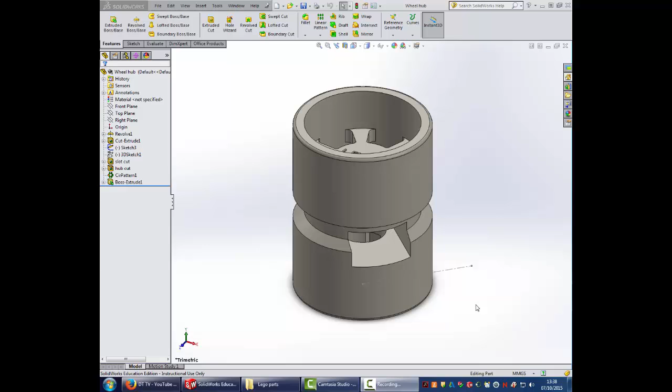Today we are looking at doing the hub for the wheel that we're going to make from Lego. The first parts are to draw this.

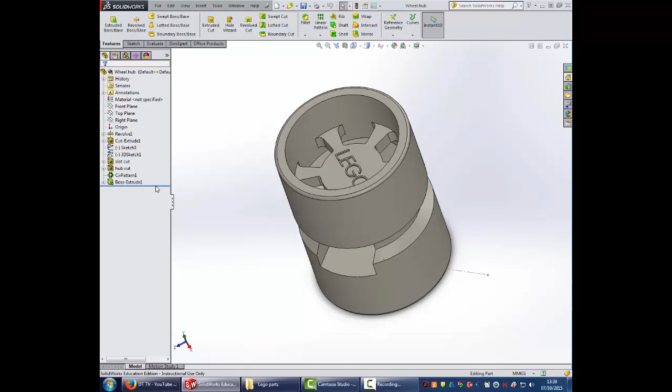Understanding it, we've already looked at the previous video, or you should have, and that shows you this comes from a revolve. In essence, what we need to start doing is drawing the basic shape. I am going to remove a lot of the detail. I'm also going to delete this revolve and say yes. The sketch you need to draw effectively sits in this area here, because what we do is use this to make the shape.

Now all the dimensions will be on the technical drawing that's going to follow this, and in essence what we do is draw this shape, making sure we've got all the right sizes. You'll notice there's a number of centre lines, and it's down to you to recognise where to put them. There are aspects where if we've got a centre line, it's probably going to be symmetrical around edges. The other thing to remember is that as you draw this, centre lines will not affect the island that you're drawing. However, if you leave them as solid lines, or solid lines floating around or on top of each other, that will have an effect and will stop SolidWorks from propagating your shape.

We're going to use a revolve, so click on the revolve tool. What it asks us to do is pick our sketch that we want to revolve, and I'm going to choose that one. So we go from being grey when it's inactive to being blue when it is active. It's asking me for my axis of revolution. Click on there, pick the centre line, and then as you can see, that gives us our 3D shape.

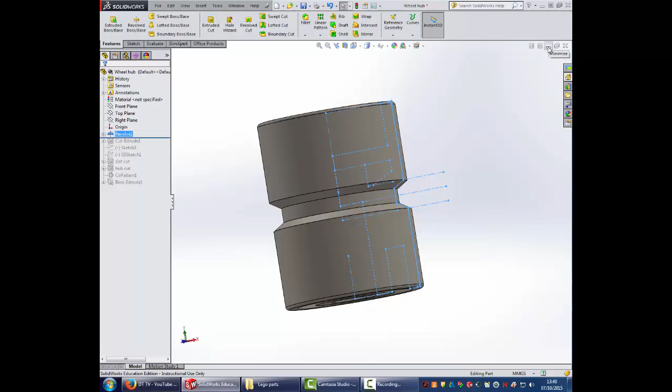With that in mind, we're now going to move forwards and have a look at the technical drawing.

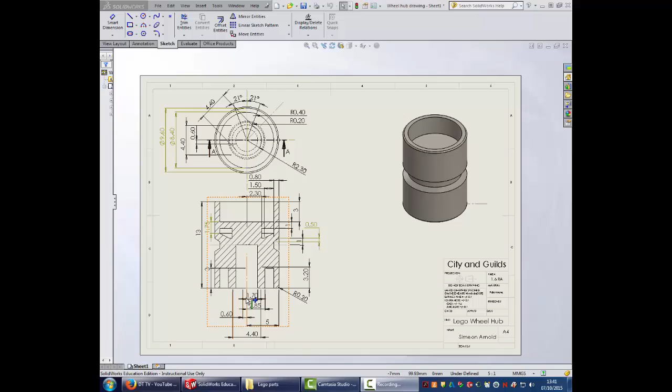So as you can see here, this is our technical drawing. Now it's got all the measurements on it that you require to work out the component elements and aspects. When you look at it, there are some dimensions that are obviously core important. We've got all the distances, so we've got leader lines that point at the lines above them. We've got the centre line here, so everything is measured from that centre line, so the arrow here points at the centre line, so the line, if I zoom in on it, you can see is 1.7 between the arrowhead there, which leads to this line, and the centre there.

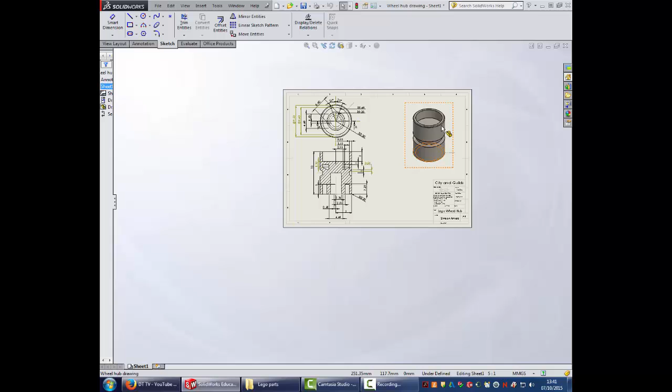Now remember, you're only drawing half the shape, so you're going to draw this half, or the other, depends on you, but it's only one half, because then we use the revolve tool to change it into our rounded shape. At this stage of the video, you should pause and use the dimensions here to create your shape.

Now importantly, whilst you're creating this shape here, there are dimensions in this view which are giving you more details. So for instance, you can see it's talking about the diameters of the circles here. If you can't find your measurement in this section, then refer to the one above. There are some dimensions in this view, such as the degrees of various component parts, which are not yet important to us. So focus on this shape, draw the half shape, and then restart the video once you've finished that.

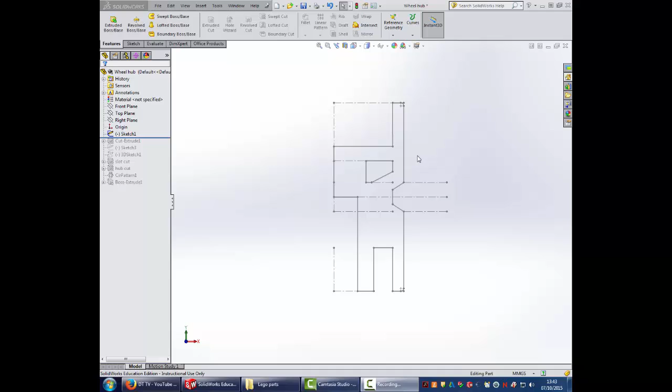Okay, so that's obviously taken you a little while to get to this stage. You're likely to have measurements and various other bits and bobs on the screen, which I've removed for clarity, but don't panic about that. You're now going to come into the 3D tools.

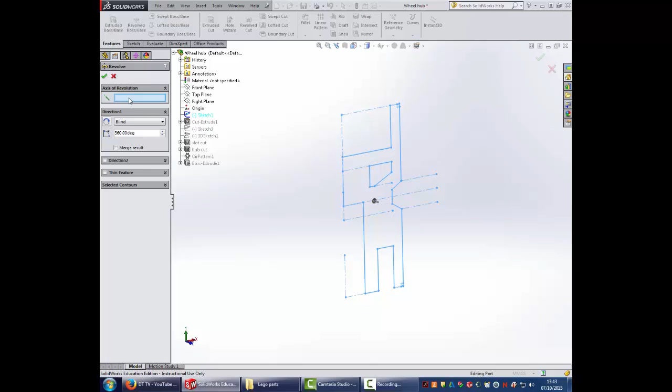You're going to use the revolve tool. You may not get this asking you to pick your particular frame, because you've already got it selected, so if it's dark blue or black, it's already there. So I've made mine so that it's come active again. In here, I've chosen the revolve tool. The axis is the centre one. Make sure you pick the right one, because if you pick the wrong one, you'll end up with an entirely different shape. So pick the central axis and then green tick it.

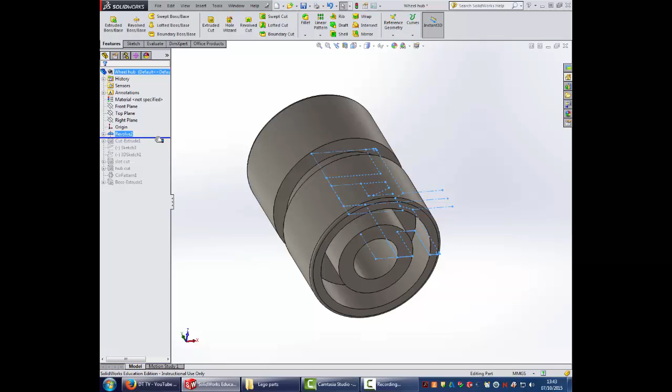Okay, so at this stage, what we've got now is the basic shape, and we need to start considering how we're going to chop the cross section into the bottom. The cross section is going to look like that in the bottom. So at this stage, we now need to work out how big and how to draw that. So we will now focus on that particular section.

So we're going to return to the technical drawing. I'm going to zoom in on this particular aspect. You'll notice the cutaway sections are represented by hidden detail, because we're looking down on the top of the view at the moment. We know they're in the bottom, so make sure when you do it, you're cutting into the bottom edge rather than the top edge. And from here, we can then work out how to do it again.

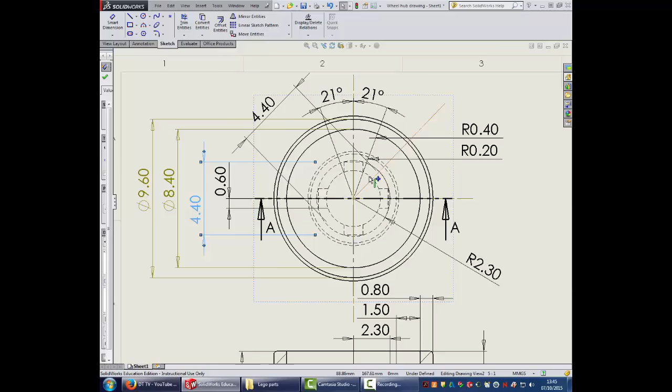There's 4 of them. There's a centre line coming across here, and there's also a centre line across here, so they are symmetrical. You'll also notice that the outside dimension with the 4.4, all the corners of each point meets within this inner circle, and each of the pieces is 0.6 either side of the centre line. Where it meets, it's then got a flat edge.

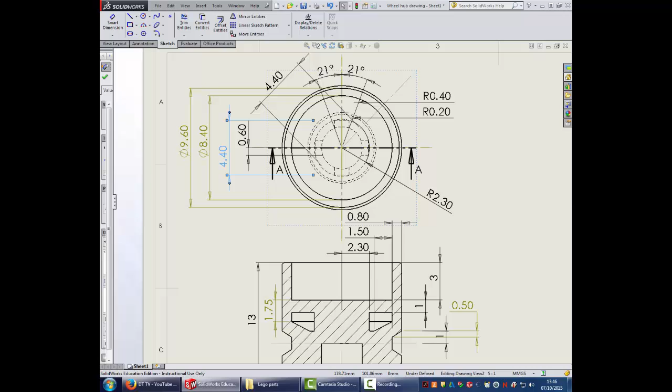So you should now draw that particular part of the drawing and then use the extrude cut tool to cut that into the product. When doing so, you will notice that you need to cut to 3 depth. So I'll leave you with that. If you pause the video and then put those aspects in, then return to the video when you've done it.

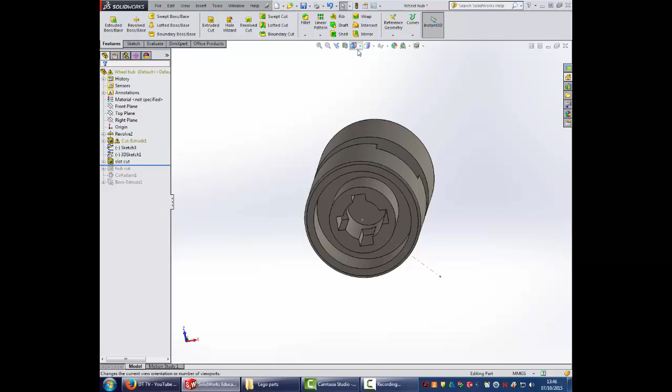On the next section now, we're looking at cutting the slot that cuts through the middle of here. Something you'll notice is that the slot itself is cut at 45 degrees to the rest of the components you've just done. So for instance, when we look at the bottom view, if I now show you the cut by going to hidden detail, you'll notice that the cut is at 45 degrees across.

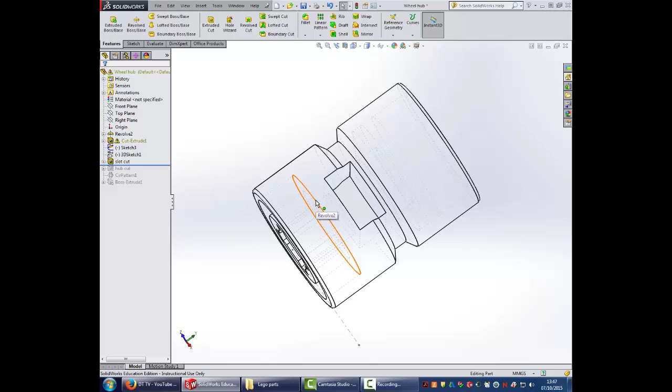Now one of the problems we have here is the fact that the circular hub is circular. That means we don't have any straight lines or straight edges pointing in the right direction to allow us to cut this particular section from the body. That means we need to create a new plane, so I'm going to show you how to do that now.

Using the sketch tools, we start here. We're going to sketch on a flat face that we know is perpendicular, 90 degrees to the view we want, and I'm going to go normal to that. At that stage, I can create my face in the middle or at some other level here, but it's easiest to do it from the middle.

So I'm going to draw a centre line, from the middle point, and make sure that it drops into being 45 degrees, 135 degrees. It depends on which way you want to do it, so have a look at the model. Because it's symmetrical, you don't have any major issues there. So 45 degrees. The important aspect here is where this point is.

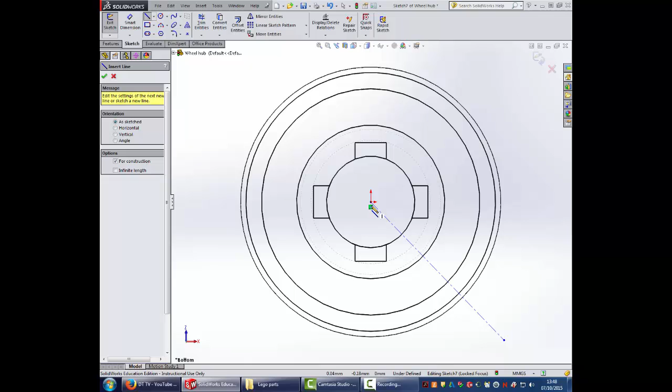I can use the end points of either here or here to create my plane, and I want one that cuts straight through the middle of my model at 45 degrees. So we'll now do that. Green tick that. I'm now going to exit out of that sketch.

Okay, from here I can then create my new plane. So what I'm going to do is use the new plane tool, the one up here. I'm going to choose the point of my line, and I'm going to choose the line itself. Now you'll notice that when I do this, a very large yellow plane comes up.

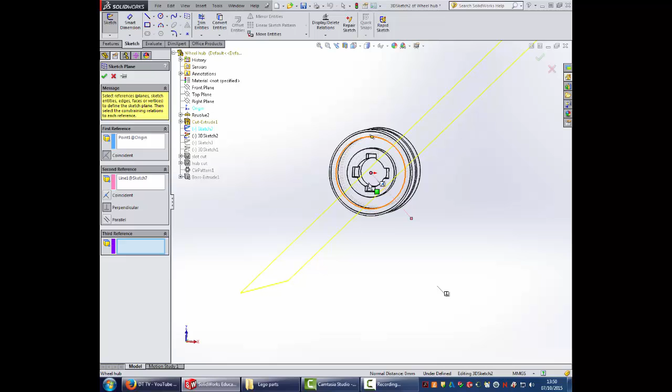Sometimes they're at a slightly wonky angle to everything, that's not a major concern. If I want the plane to cut across it this way, that's absolutely fine, I could sketch on it. Equally, I could use the perpendicular tool, because I've chosen the end point. That puts it at 45 degrees the other way.

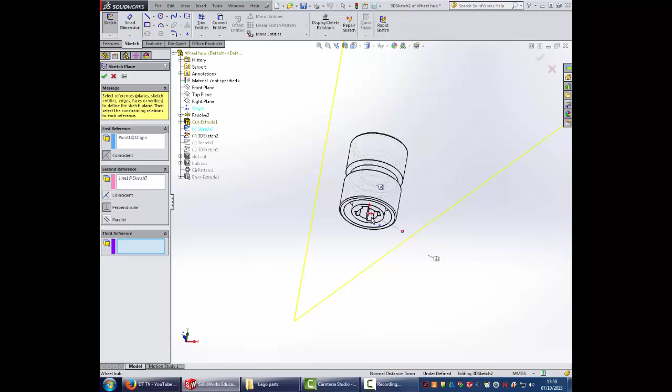As we discussed, this is a symmetrical shape, so at this stage there are no concerns in terms of which way it is, but it's a good way of making sure you can then change it. Equally, I could have chosen parallel to the line, that gives me more options. So when creating planes, you can play with how they sit in reference, but they're always at 90 degrees to the end of your line, the direction the line was drawn in. I'm going to green tick that.

Now this produces a small problem. First and foremost, the plane we're drawing on is huge, so it's quite difficult to manage sometimes, so dragging it down in size is quite useful. The second problem is that we've got a 3D sketch. 3D sketches are very complicated and tricky in terms of what they are. A normal sketch icon looks like this, and the 3D sketch looks like this. The issue is that 3D sketching involves drawing in a number of planes and understanding a far more technical way of creating your shapes.

It can be very useful, but unfortunately it's something that we don't use due to the levels of complexity, and also the fact that we can normally work our way around it without doing it.

At this stage, I've got my 3D sketch here. I do not want to draw in this as part of this 3D sketch, so I'm going to exit out the sketch. If you press the red one, it will delete the whole plane and everything else. We don't want to do that.

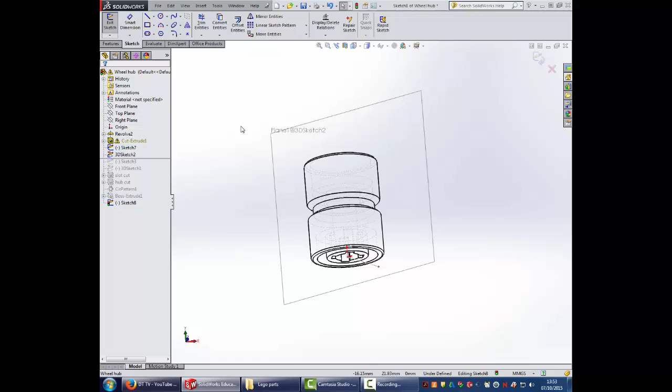We just want to exit out the sketch, so put that closed. Now what I can do is click sketch, and then choose a new plane. You'll notice a new sketch has popped up, and we're no longer using the 3D sketch. That allows us to sketch freely and create the shapes that we need.

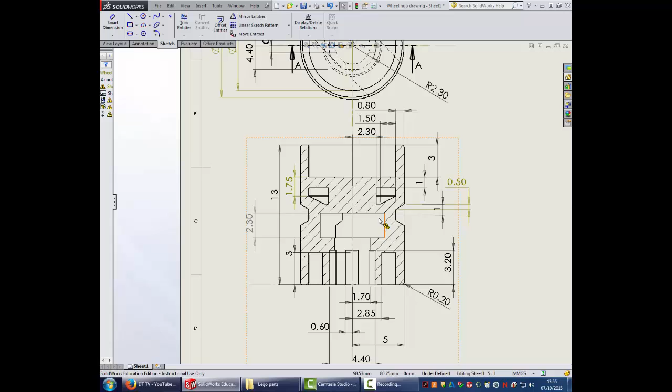Here we are looking now back at the technical drawing with the new slots cut in it. You can see that it's 4.4 wide, represented by the dotted lines, or hidden detail, that is popped in here. Equally, looking down in the bottom view, the slot is represented here, and it's 2.3 wide. I'll minimise this and go back to our design.

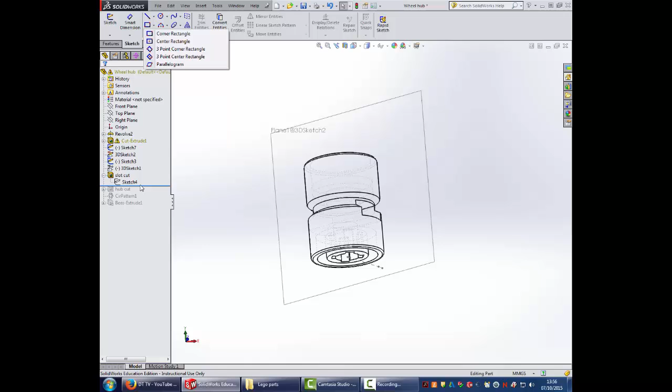If we look at this, we have the square tool, and the easiest option here is to use the center rectangle and then dimension it. You can use the middle as your point, drag your shape out, add in the correct dimensions, and then do an extrude cut through your shape. Do those steps and then we'll move on to the next one.

Now we're going to get onto cutting this shape from the top of the hub, and then what we'll do is pattern that shape around to allow us to cut each of the 6 aspects here.

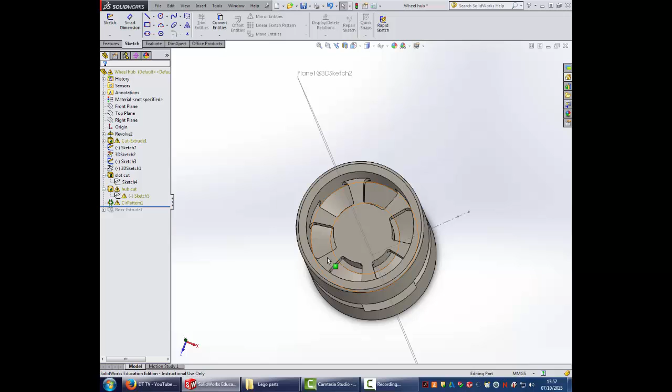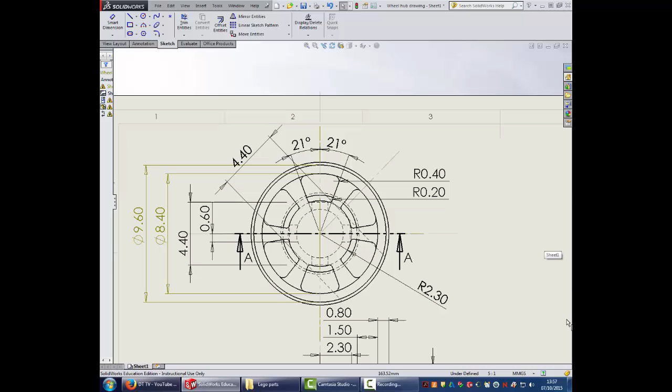Back to our technical drawing. We now have the details in here, and you can see the shape that's drawn in the centre, 21 degrees from either side. We've got the dimensions for the overall size on the outer edge, and equally the size for the inner edge here. So using the dimensions, including the radius, I want you to now draw this shape across here. Having done that, you should then return to the video and we'll carry on.

In order to do our circular pattern, you will be at the stage where you have cut the shape. It's much easier to pattern shapes once you've done a physical 3D aspect to it. Those of you paying particular attention may have noticed a few issues here. It's because I've come back to my model and undone things so that it allows us to do the tutorial. You're unlikely to have them, so these are error messages. Even if you do have them, it will still work, so don't panic too much about that.

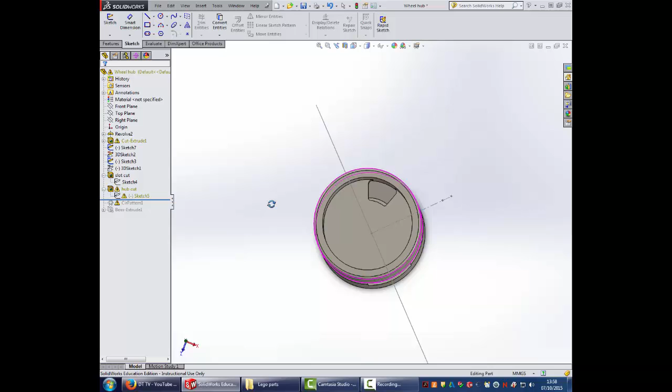To do this, what we now need to do is work out how to do our circular pattern. So we've made a 3D shape, which means we have to do a 3D pattern. Under the linear pattern tools, there are a variety of different options. Circular pattern is the one we want, so I'm going to click circular pattern.

It's asking me for the center axis. The issue we have here is we don't have any lines or points in the center of our shape, so I'm going to go to view and then temporary axis, and that will give us the middle line. It's also given us some additional lines in terms of the centers of the circles that we used to create these shapes. I'm going to pick the middle one. You'll notice the line in the center by my cursor goes green, a straight line. Click on that one. I then have to tell it what feature.

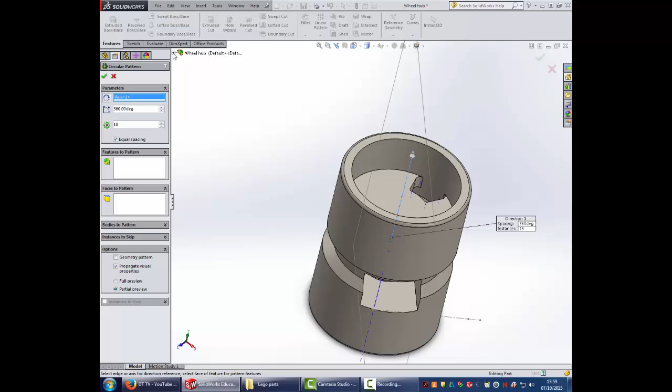You can click on it by clicking the actual feature in the shape, but that's quite tricky sometimes. So the easiest way is to click the little plus in the corner here, and then find our shape, which is the hub cut there. I don't want 18, I want 6. So 6, and then equal spacing, and then I can green tick.

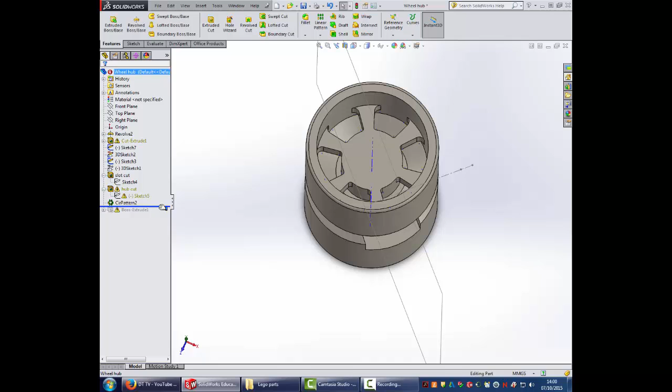That gives me the hubcap on top. From this stage, we've now got the final aspect, which is simply putting the Lego logo on top. So you've all done that before, so popping in the Lego logo at 0.1 raised from the top.

Having done that, you should save your shape, and then you should do your technical drawing.